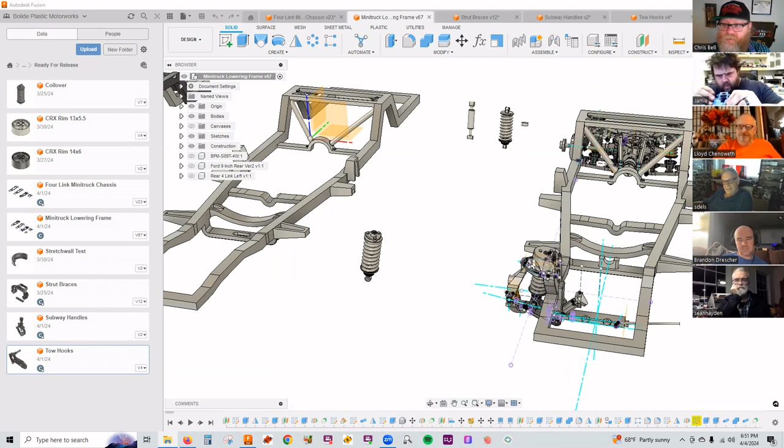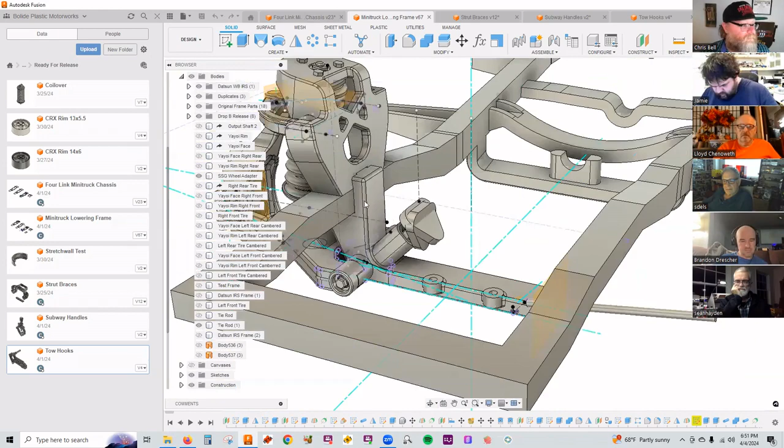The first thing, actually I'll show you when we look at the 4-link, but we did add motor mounts. We had some requests for adding in motor mounts so you didn't have to fully scratch build those. And so taking a look here, you can see we gave you a new version of the lower control arm mount that has this provision built in for these motor mounts.

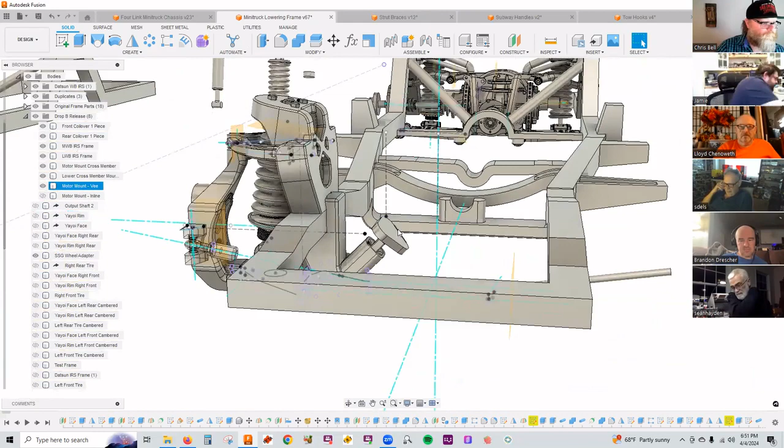So we gave you two versions, one that sits basically at a 45-degree angle for supporting if you're putting a V8 or a V6 in this. And these are adjustable.

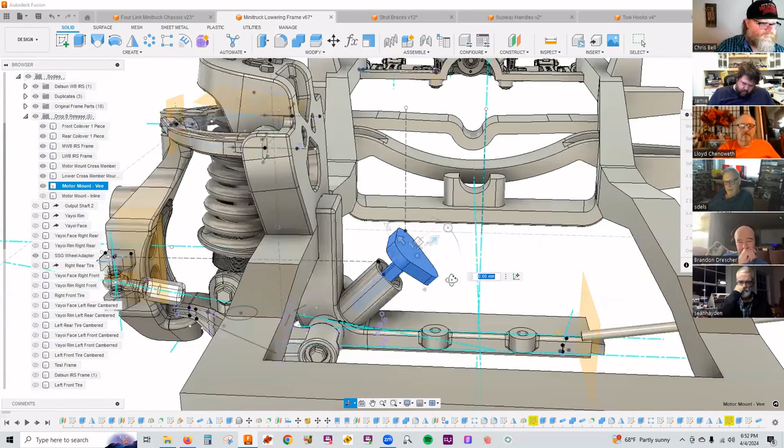So the new lower control arm mount has this sort of female pin here, and then the motor mounts just slot into that so you can position those where you need. So like I said, we have the V8, V6 version of that, and then also one that has this mounting plate, the engine mount plate, vertical for inline engines. And so that covers all of that.

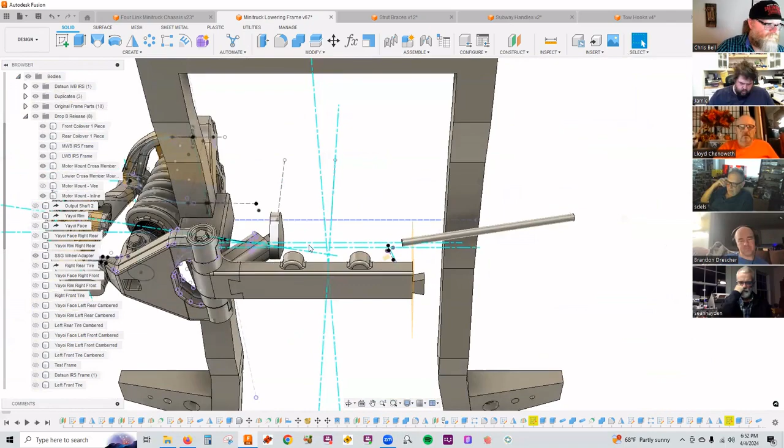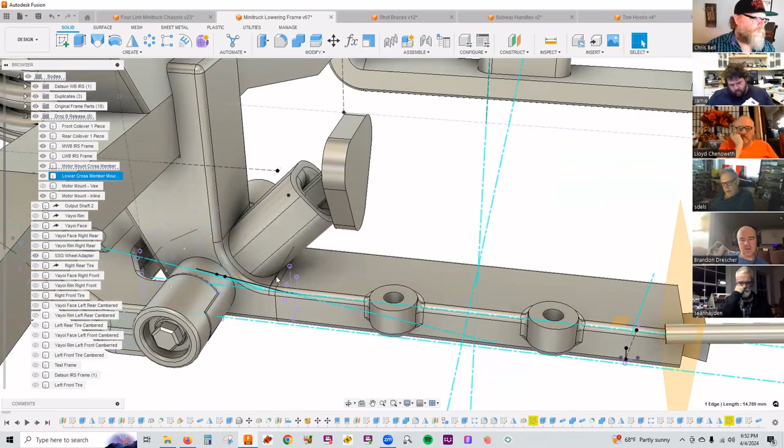One note about this, everything is the same except we gave you a new cross member that's to be used if you're using the motor mounts. This one actually just has the locating tabs reversed, so they're on the bottom, because on the previous release they were on the top and you wouldn't be able to get the cross member located with that motor mount in the way. So we flipped those to the bottom here, as you can see.

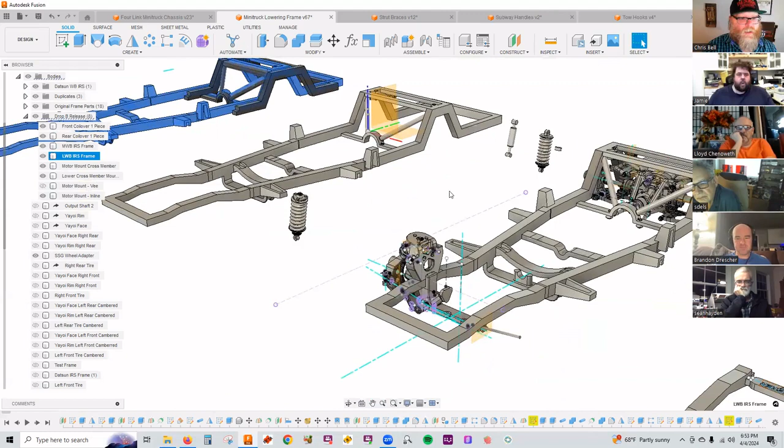We also released a couple different wheelbases, so now we have the medium wheelbase and the long wheelbase version as well. I'll be putting out a chart that shows you which wheelbase frame you need depending on which mini truck you are planning on putting this under.

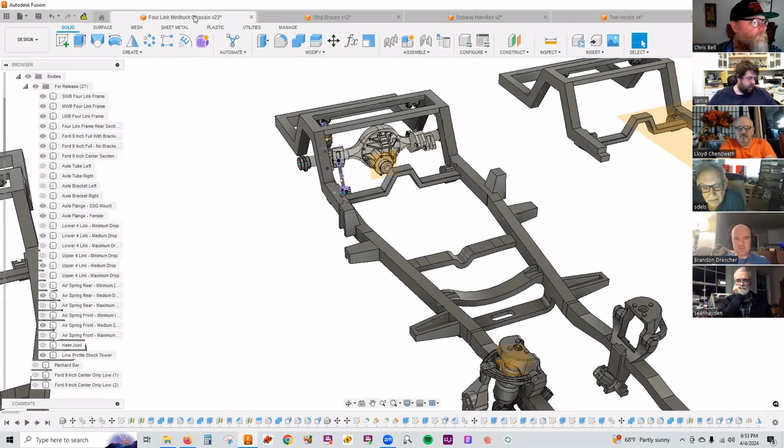Next we'll take a look at the 4-link version of the mini truck chassis. So again, we've given you the same wheelbases, short wheelbase, medium wheelbase, and long wheelbase. Given the adjustability of the front suspension, since you can move these suspension mounts forward or backward a good degree, these 3 wheelbase versions got us where we needed to be for several different mini truck kits.

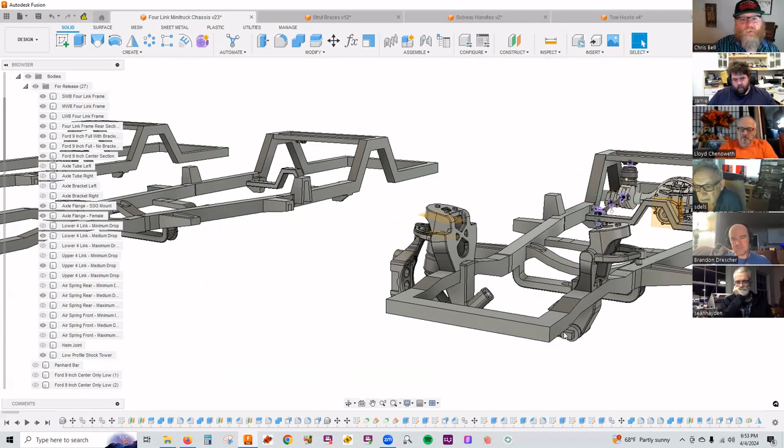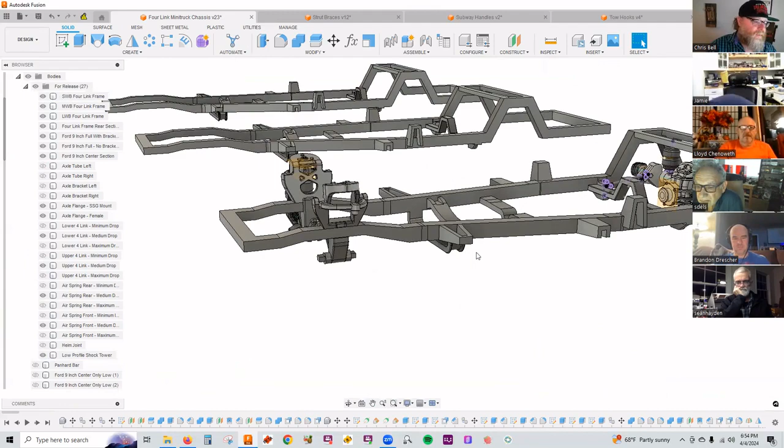Looking here, I'm going to hide some of the other ones. We also gave you just the rear section, the front section would be the same. In the Drop A release, we gave you a front and rear section, the rear section was specific to the independent rear suspension version. The front section will be the same. So if you have a kit where it makes more sense to just graft in the front and the rear of the suspension rather than use the whole frame, then you can use these pieces instead.

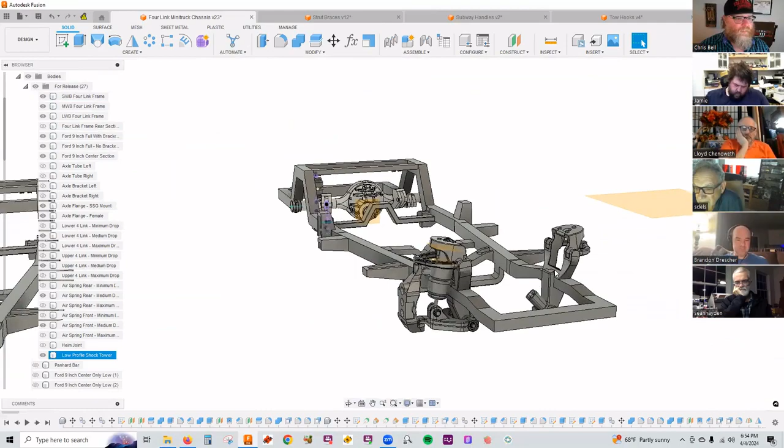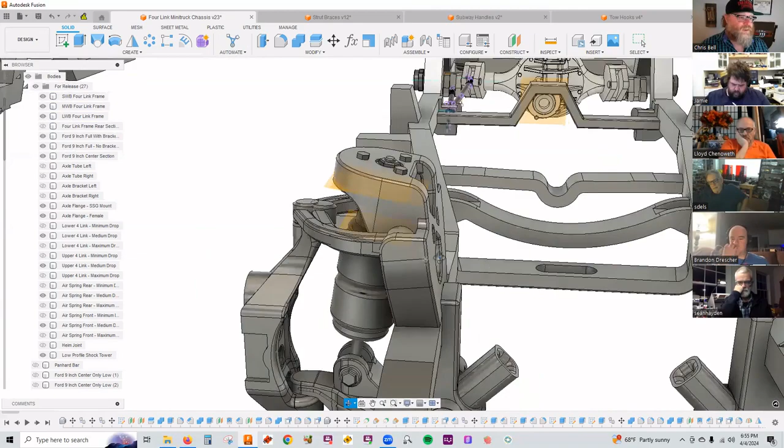And so I mentioned when we were looking at the other frame here, the new shock towers. One of the issues I was coming up against was trying to install a turbo SR20 motor into the frame with the stock shock towers, the shock towers from the Drop A release. They're just too, the engine was too wide because of the way the exhaust manifold and turbo sits on one side and the intake manifold sits on the other side.

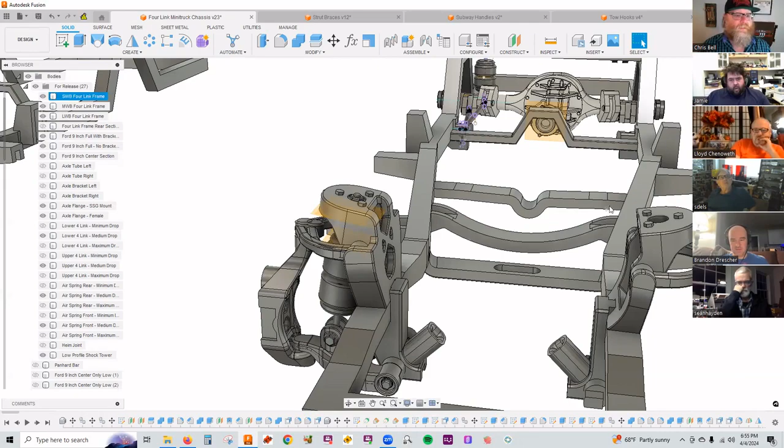So what we did on the left here, you'll see this was the shock tower from the Drop A release. If you need more width, if you're putting a turbo motor in this thing, or if you're putting a V8 or a V6 and you need some additional width, we did a low profile shock tower, which really cuts away a lot of the meat on the inside and should give you, I think I measured about 3.5 additional millimeters of width there. So that should help with wider engines.

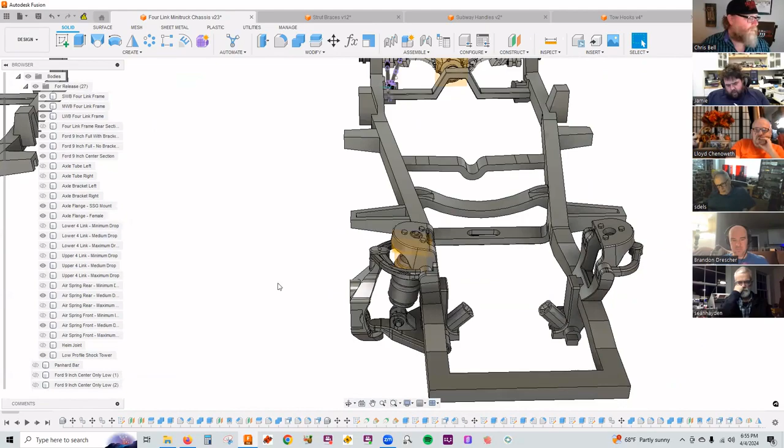The other thing you'll notice is, since we gave you coilovers on the independent rear suspension version, on this one we decided to go with air suspension. So we gave you 3 different versions for front and rear of air shocks, and I'll show you what those look like.

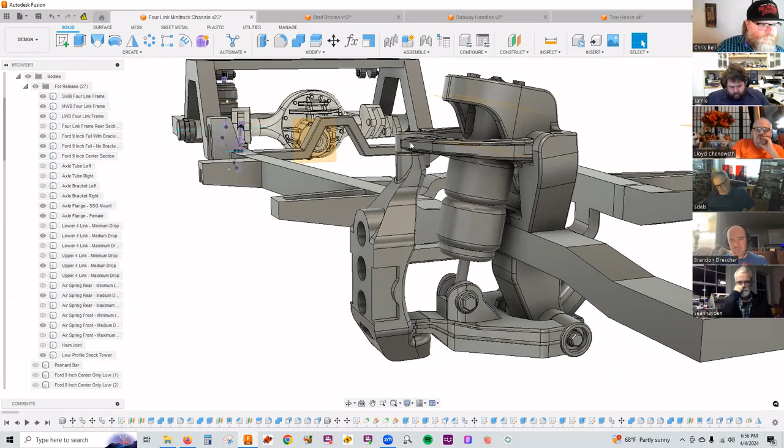Since the front A-arms don't actually move, since they are designed to stay in one place for ease of assembly and building everything, so that it's square and all 4 of your tires sit on the ground.

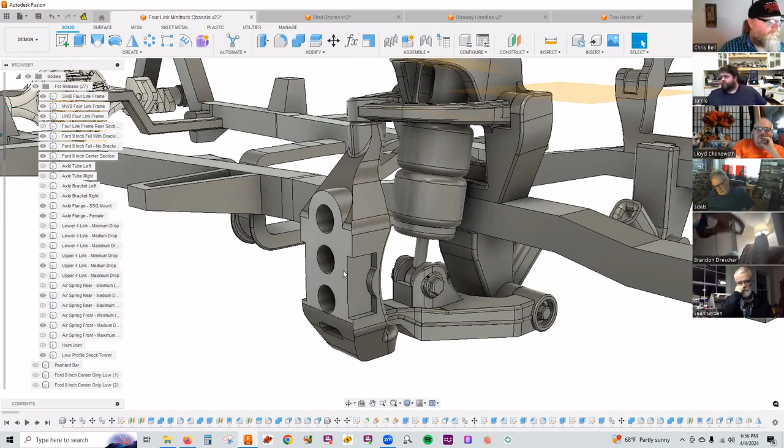Since we have these sort of cheater hubs where you can change the ride height by moving your wheels up or down between 3 positions, what we did for the front is design the air springs so that they look correct.

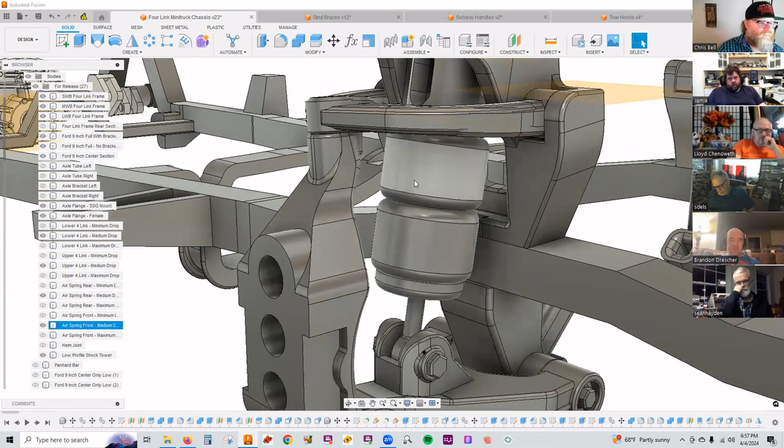So we're looking at the medium drop right now. If we look at maximum drop, you can see those are like fully compressed air springs. The medium drop, they're kind of halfway compressed, or halfway inflated. And if you look at the minimum drop, those are basically fully inflated.

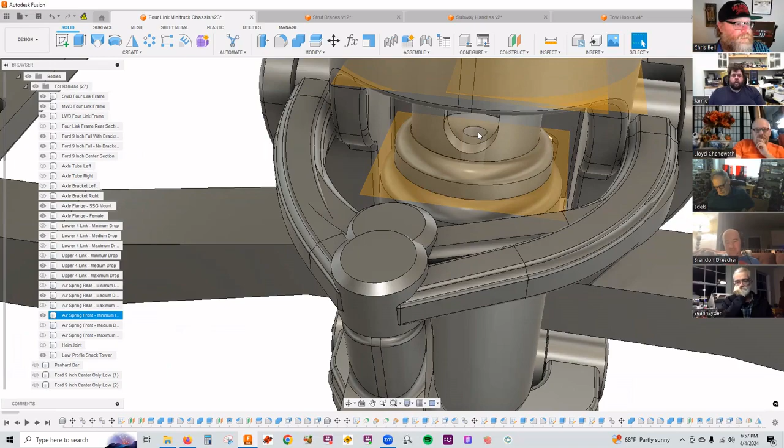Something I'll point out here, if we look in the top of the air shock, we did give you holes in all of the air shocks so that if you want to plumb these things and run wire for your airlines for that little bit of extra detail, you certainly can.

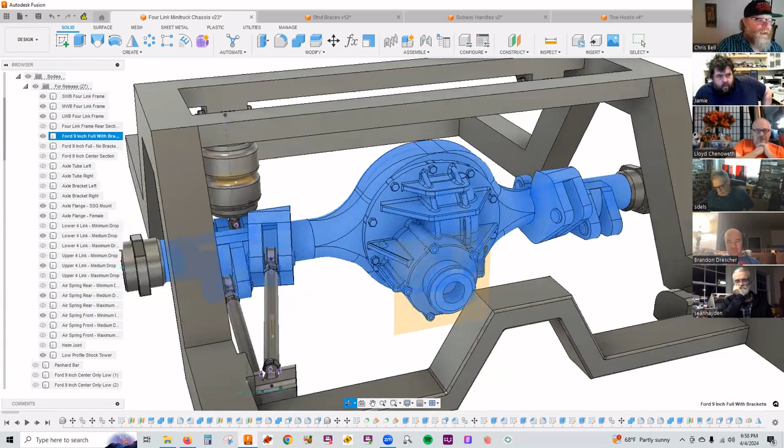Coming around to the back here, this is a Ford 9-inch rear end. We've given you a few different versions of this that you can use depending on your needs. The standard one is the 9-inch with the brackets already installed, and everything you see here in blue just prints as one piece, designed for this frame so you don't have to worry about locating these brackets properly. They're already located in place for you.

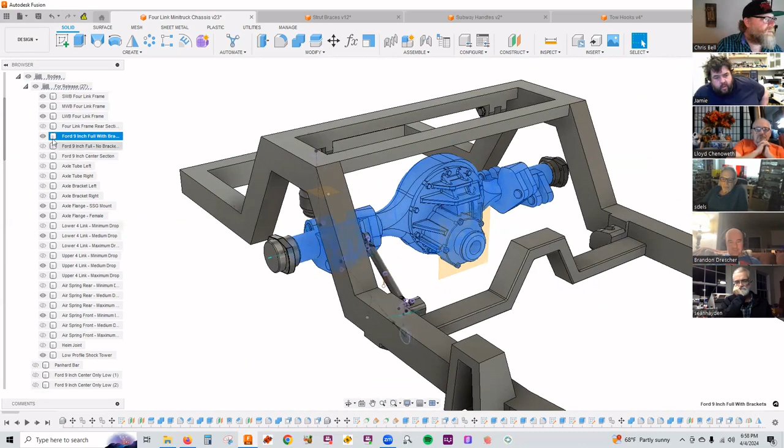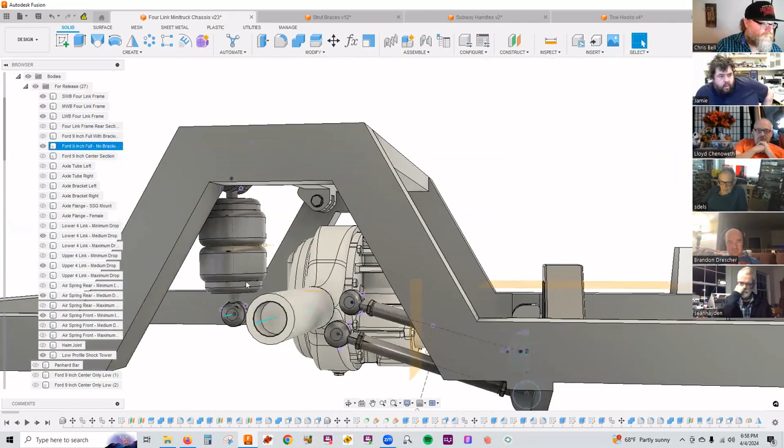But we did also do, for those of you that want a little bit more customizability or want to use the axle on other projects, we gave you just a standard version without the brackets. And if I hide the axle flanges here, we've given you just a generic recess in the end of those axle tubes, but these axle flanges will also fit.

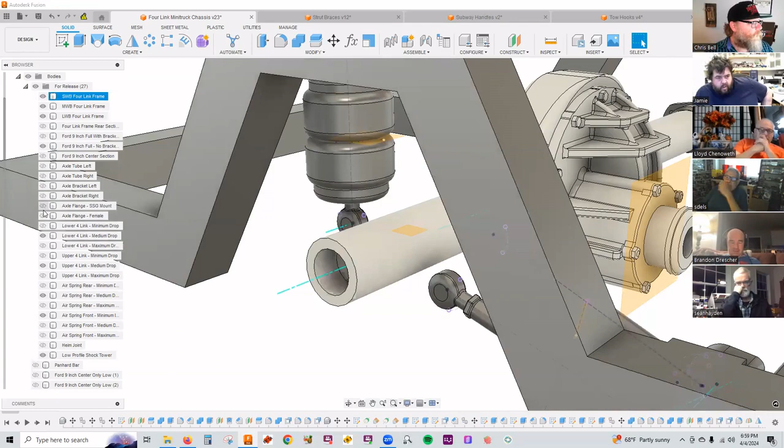This one just has our standard wheel mount on it, so the same wheel mount we use on the back of all our scale speed garage wheels will fit that. Or if you have kit wheels you want to use that have a male pin that goes into a female mounting point, we've given you that version of the axle flange as well.

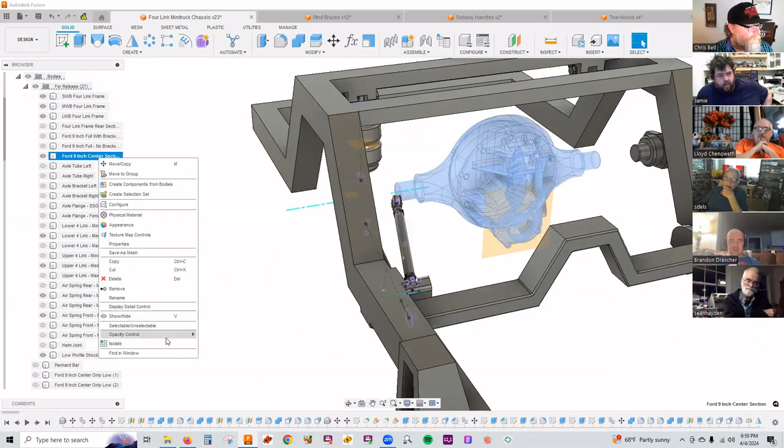And then the last thing we did, if you have a different width of axle that you need, we've given you just the center section with pegs, and you can locate styrene or aluminum tube over those pegs cut to whatever axle width you need.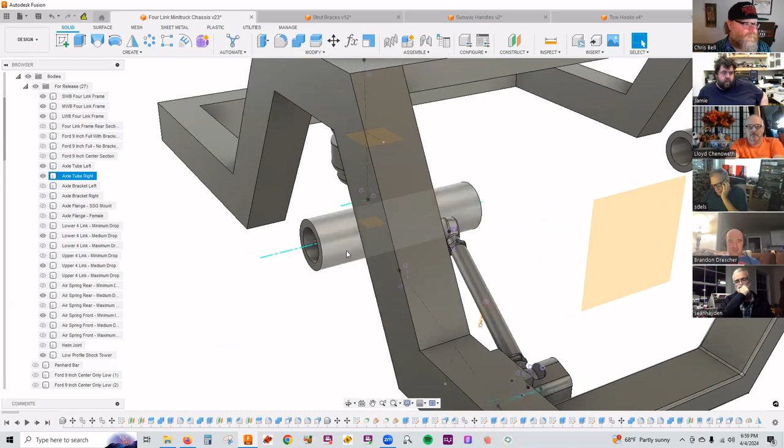We also gave you axle tubes. These would be pretty easy, if you want to go this route, when you bring this into your slicer, if you need it a little bit wider or narrower, you can pull it into your slicer and scale it up just in the long axis here to get that additional length or shorter length to fit your needs.

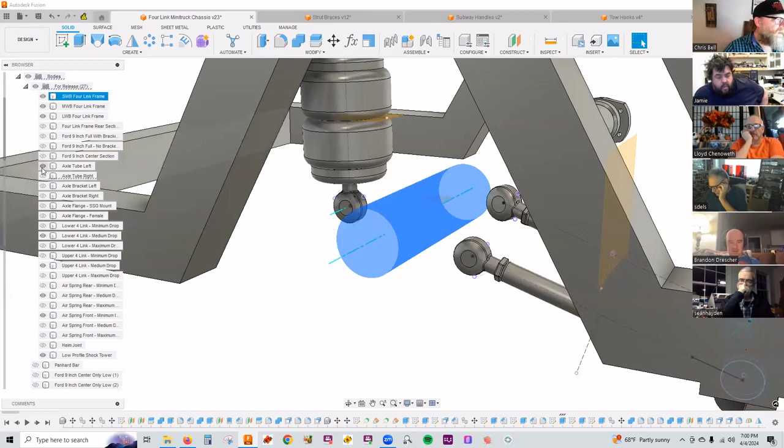And then also gave you just the brackets as well. If you're building axle tubes from styrene or aluminum, you can just slide the axle tube into the 4-link brackets here.

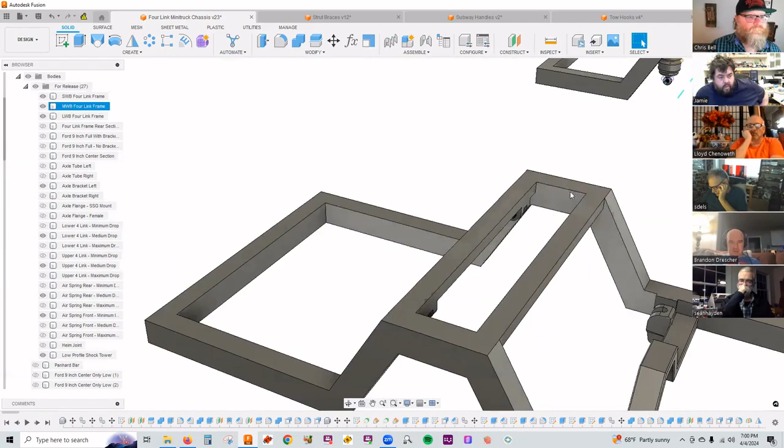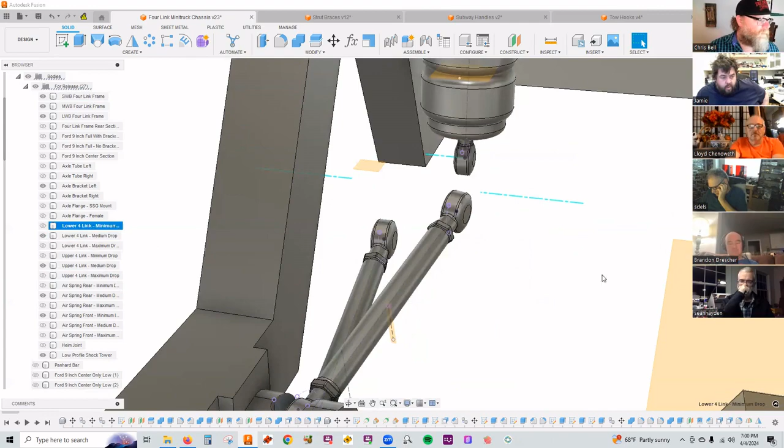We've also given you, so you'll see this is a triangulated 4-link setup, which eliminates the need for a panhard bar or anything like that. And because the length changes a little bit based on what ride height you're using, we've given you 3 different lengths of each of those 4-link bars as well. Those are labeled matching the springs, so if you're doing a medium drop spring, you want the lower and upper 4-link medium drop.

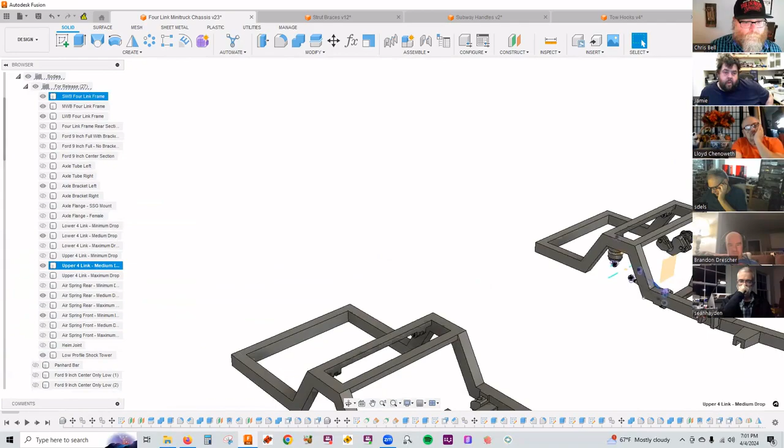Pulling back here a little bit, I'll just show you the back in the rear. We did the same thing. Actually, in the rear, because we no longer have the sort of cheater lowering hubs, just the solid rear axle, these different versions of the rear air spring are physically longer or shorter to get you the ride height that will match the front.

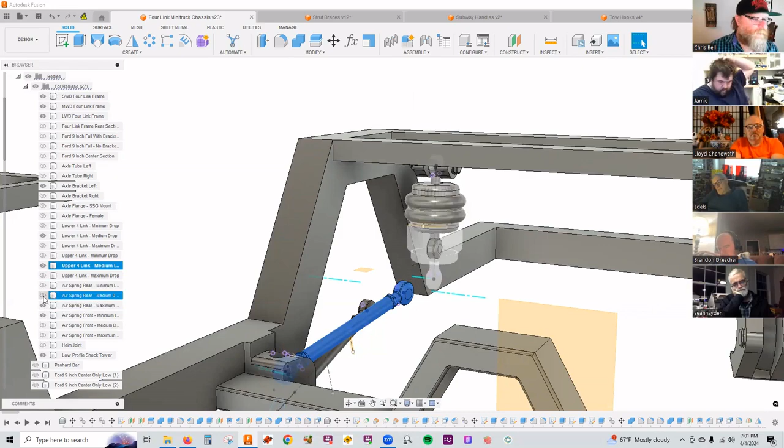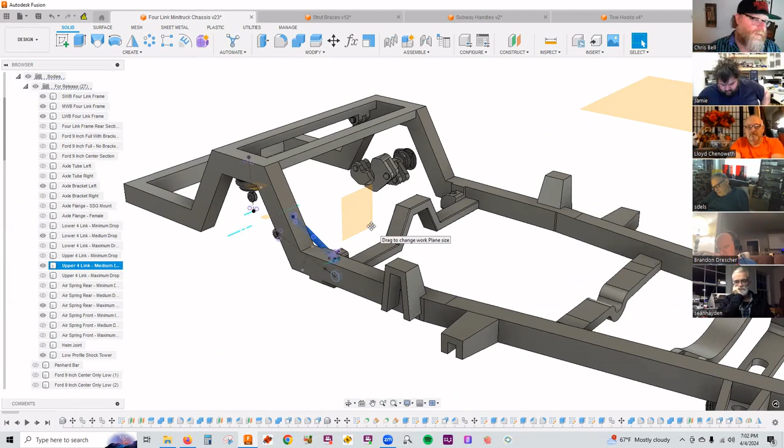This also gives you the opportunity to do something like a 70s street machine look, where you want more drop in the front than in the rear. That's definitely doable just by mixing and matching the ride heights and the air springs here.

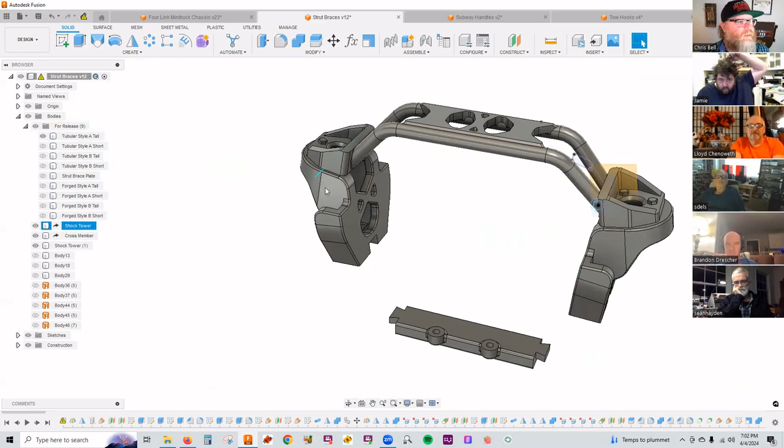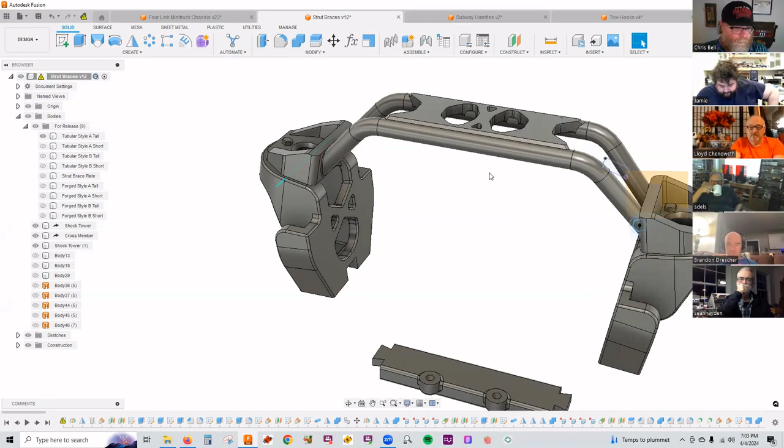So that is a look at the 4-link chassis. We've given you some strut braces as well, designed around the overall width between the shock towers for this chassis. But this is another one where you could scale these in your slicer if you need additional width or narrowing, probably by scaling in only one dimension.

Cool. Yeah, we can do that after this.

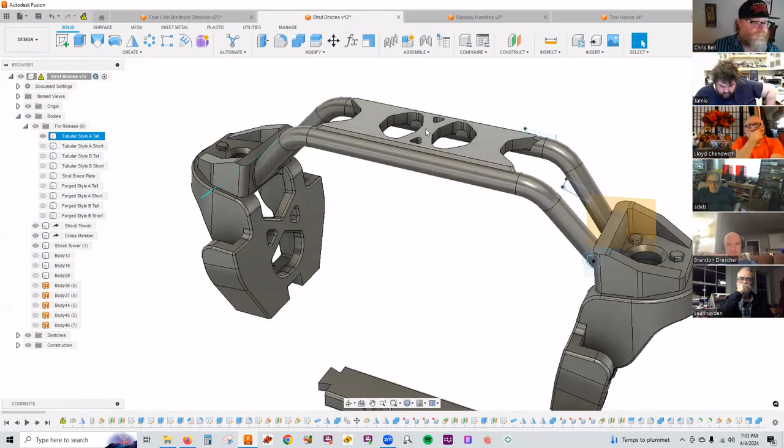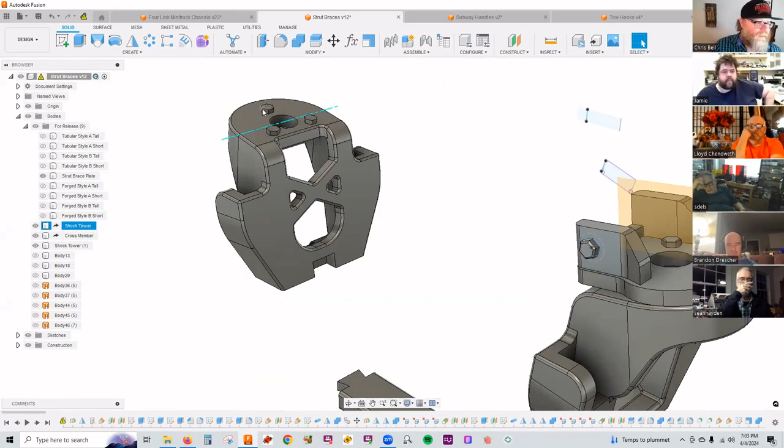So a handful of different styles of strut braces here. We have a couple different tubular styles. Style A looks like this, and we've given you a tall or a short version depending on what engine you need to clear and the specifics of your build. Style B is pretty simple, a welded tube style. We've also given you just the plate if you want to scratch build some other style of strut brace—you can have this plate that locates on the strut towers.

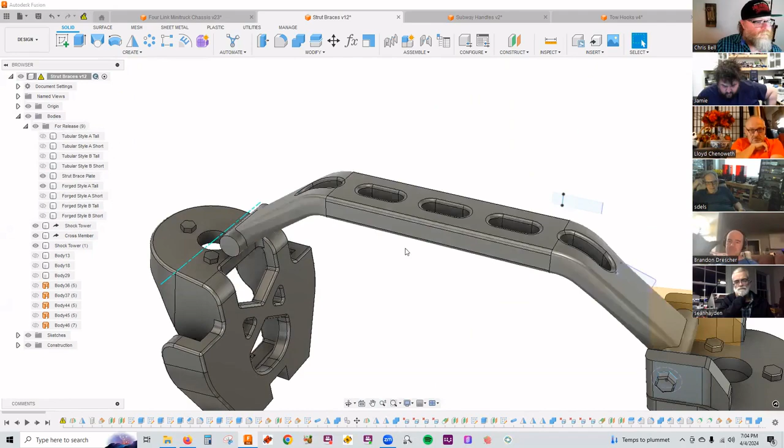And then this plate is used in conjunction with the other couple styles, the forged styles. So we have forged style A, again in 2 different heights, and a sort of setback style as well here.

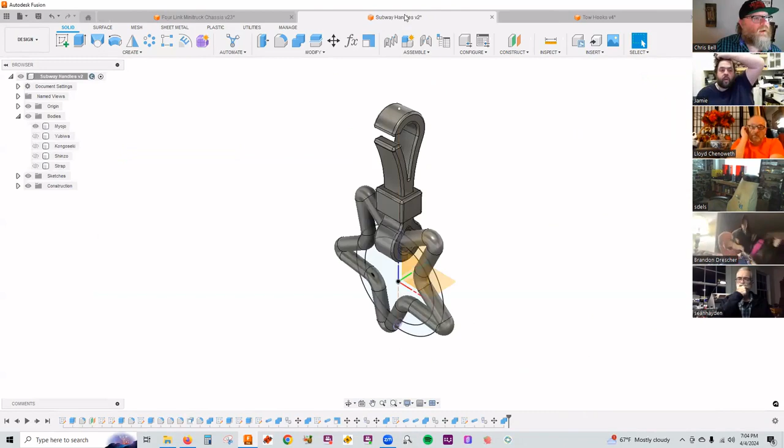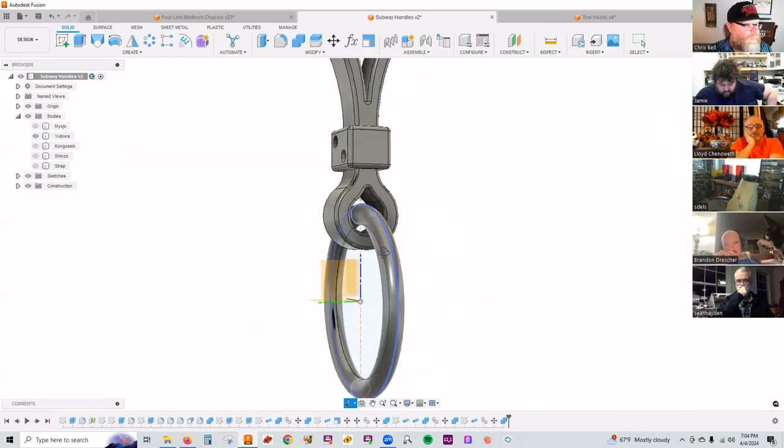And then lastly, just a few additional JDM dress-up goodies. So these subway handles you'll see sometimes hanging from the grill or the rear bumper or something. We're giving you a few different styles of these to add some fun realism to your JDM builds. We did these such that they should be print-in-place 2-piece designs.

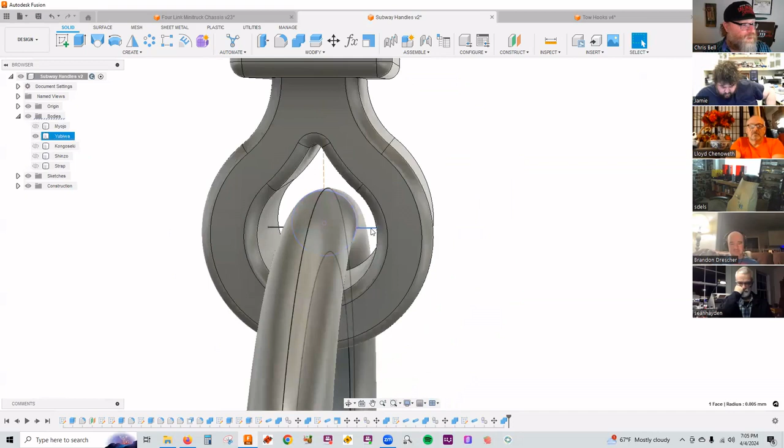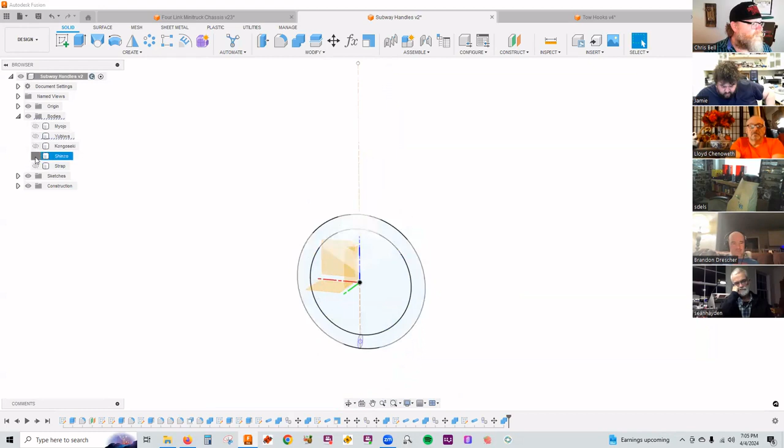So the slicer will read this as one piece because we put these tiny 0.005 millimeter pins in here. Effectively, these pins should either not print at all or print so small that you can easily break them, and then your subway charm on the end of the strap can pivot and rotate just like they would in real life. So a few different styles there, and we gave you just the strap too if you want to bend the handle portion up out of some rod or whatever to get something custom.

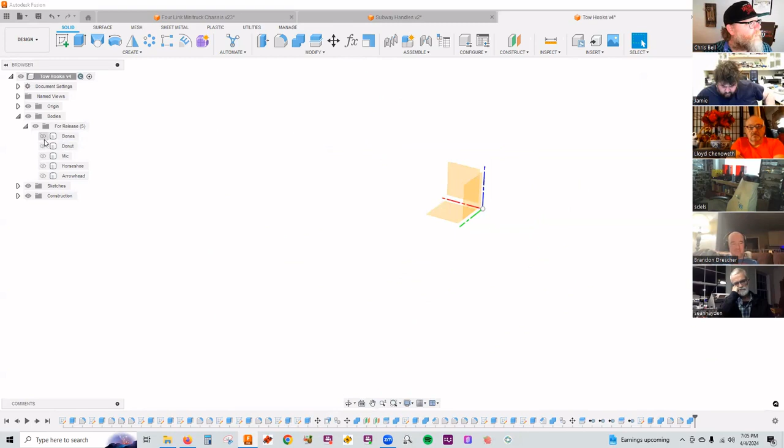And then lastly, some tow hooks. You see these a lot sticking out of the front and rear of JDM cars quite commonly. So a few different styles of tow hooks.

And so that is a look at Part B, the Part B release of SSG-038.

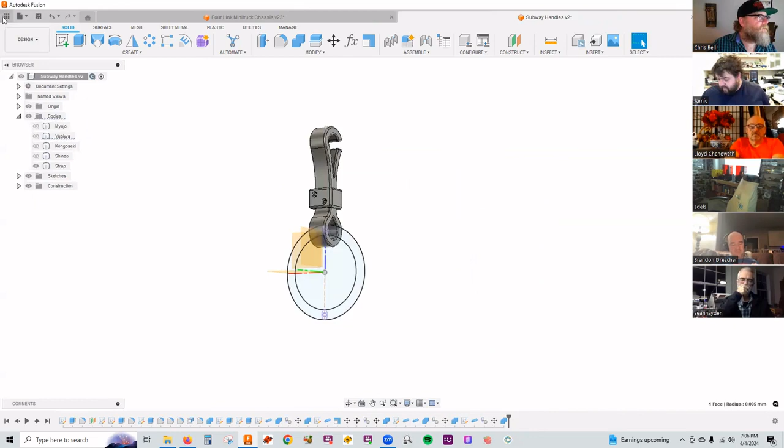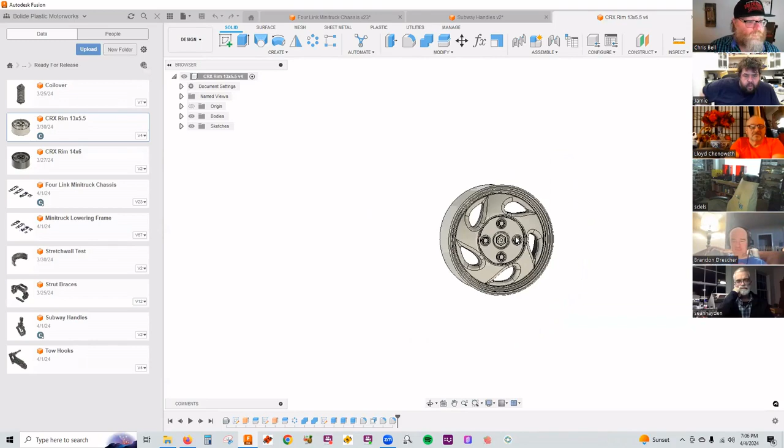Now, I did promise you a little sneak peek at the rims. These come directly as a member request from one of our founding members, actually. Requested them a long time ago, and shamefully I'm just now getting to them. But he has a Honda CRX in real life and the CRX model kit, but not the right wheels, so he wanted some CRX rims.

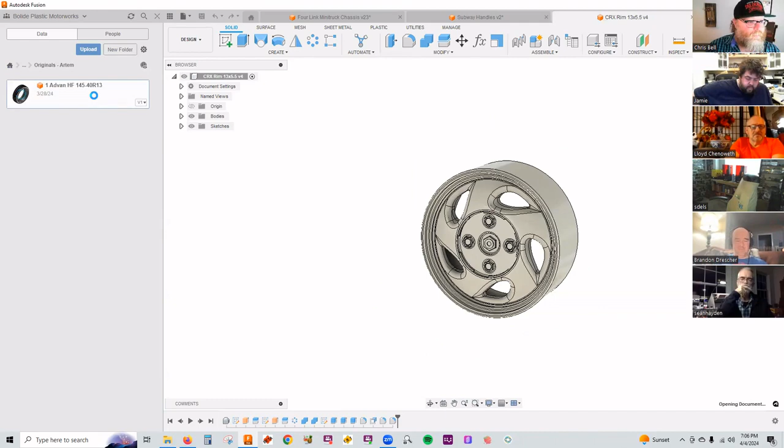So the bonus pack will be these CRX rims and the stretch wall tires, the stretch wall Advans. I can show you those two—I still have to add the lettering into these, but you can see that stretch wall profile of the tire. So if you want to go with that look for the tire, you now have that option. And like I said, that'll be a bonus file pack for Autotech and Master Mechanic members.